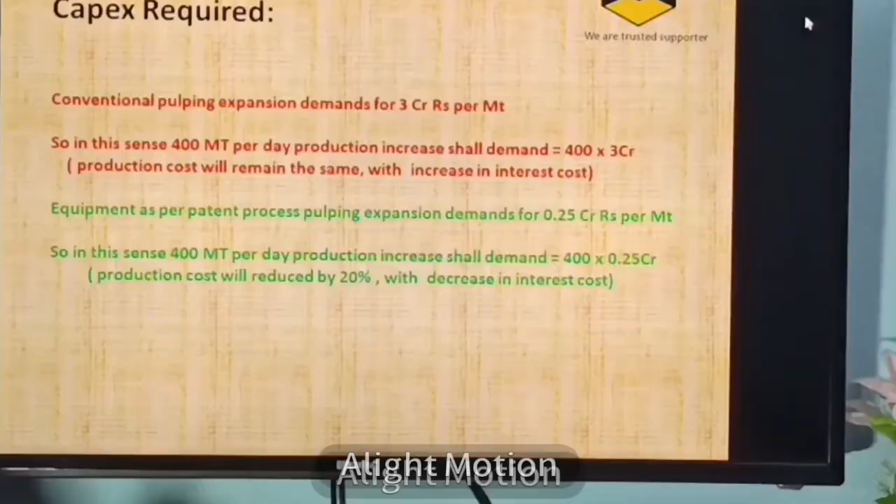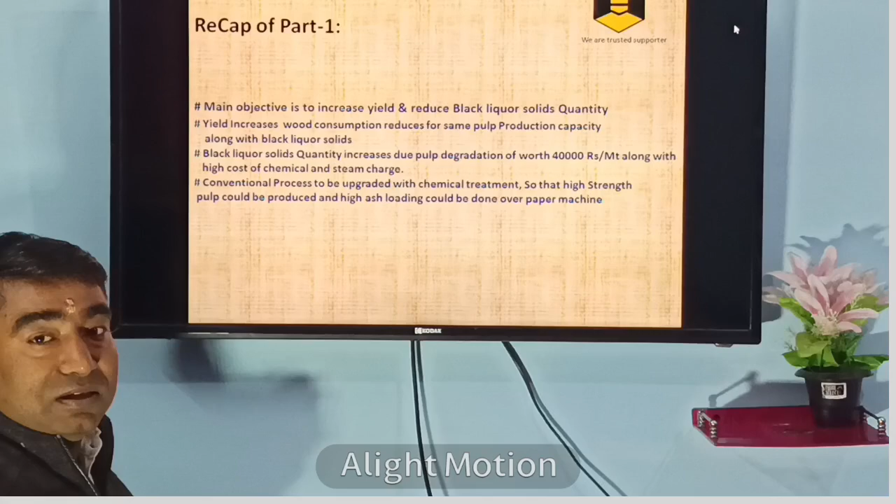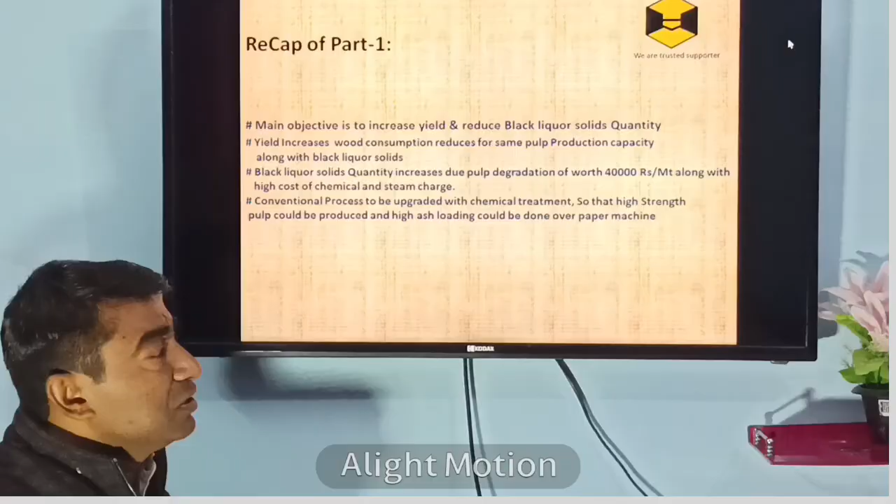In the first part, we have explained so many things. It is basically a chemical treatment of the raw material utilizing the patented process. So, recap of part 1: the main objective is to increase the yield of the pulp and reduce the black liquor solids quantity. As the yield increases, wood consumption reduces for the same pulp production capacity, along with reduction of black liquor solid quantity. Black liquor solid quantity increases due to pulp degradation, worth rupees 40,000 per metric ton, along with the high cost of chemical consumption and steam consumption.

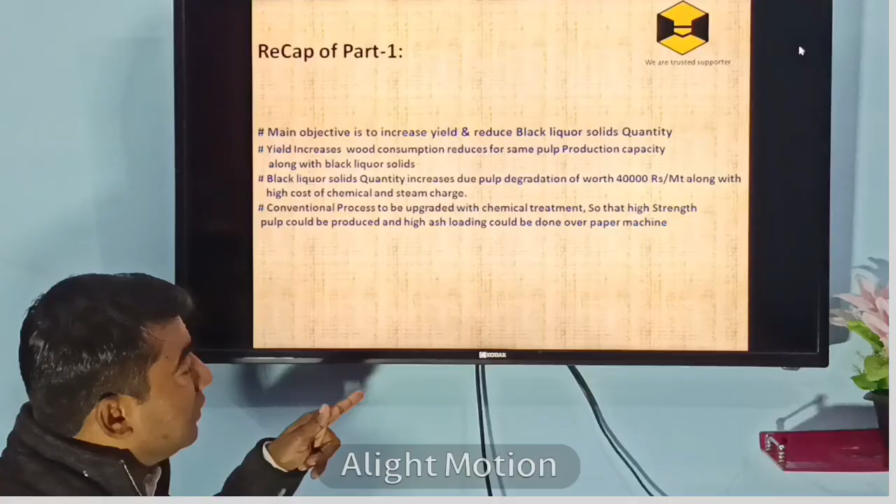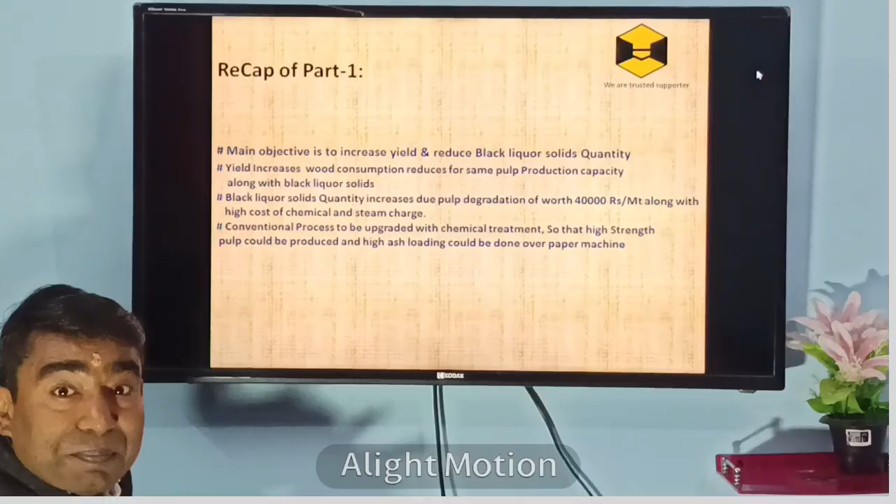The conventional process needs to be upgraded with this chemical treatment so that high strength pulp can be produced, which in turn will help to load more ash over the paper machine so that the overall cost of production is reduced.

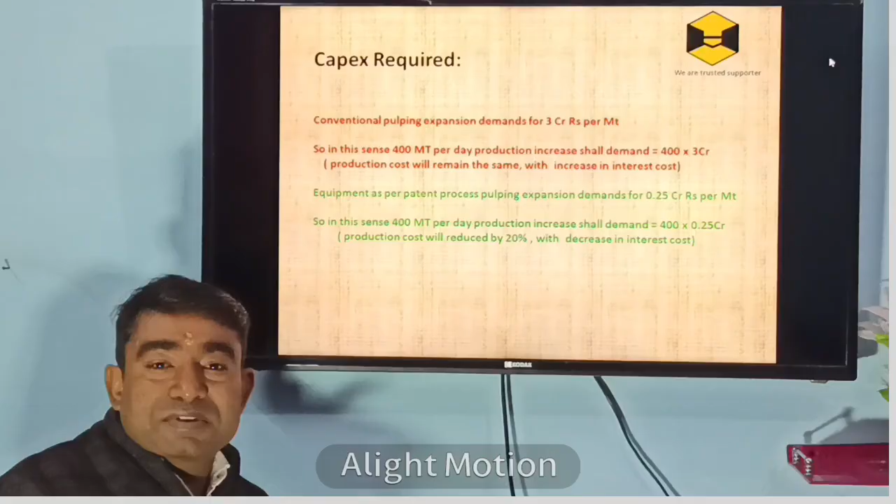So now, as I told in the previous version, how much it will cost to invest, how much it will cost to install this plant, and how we calculate the economics related to it.

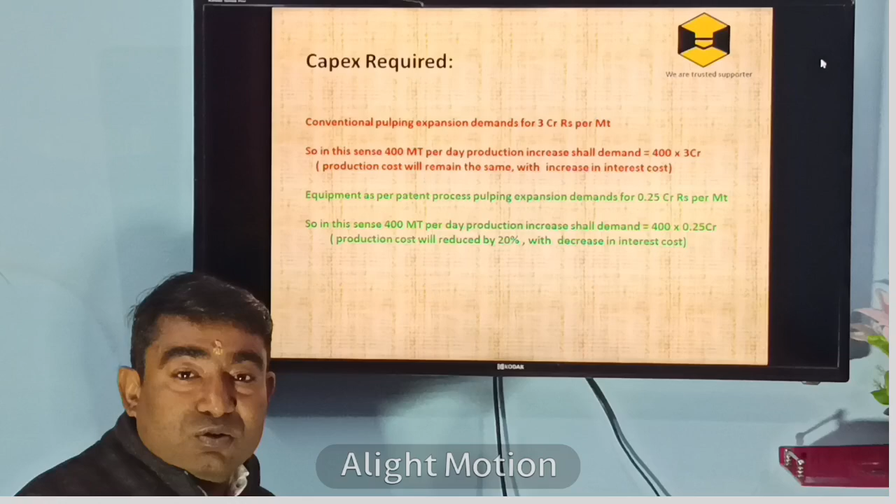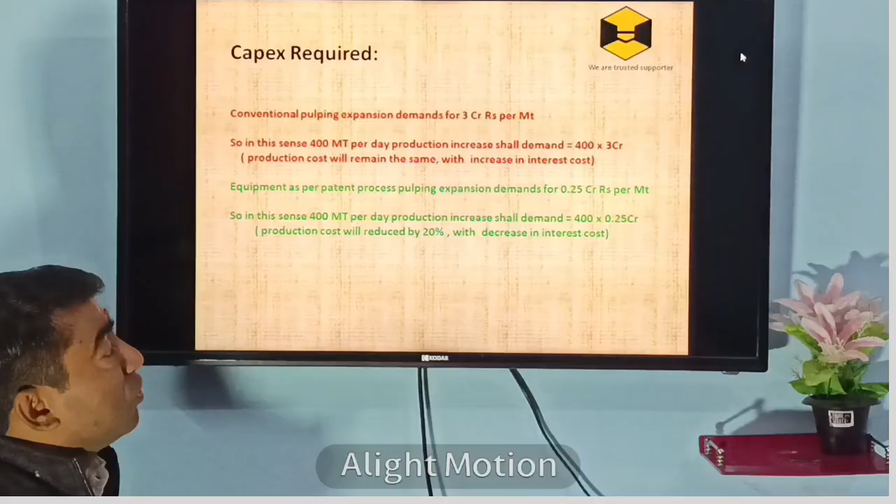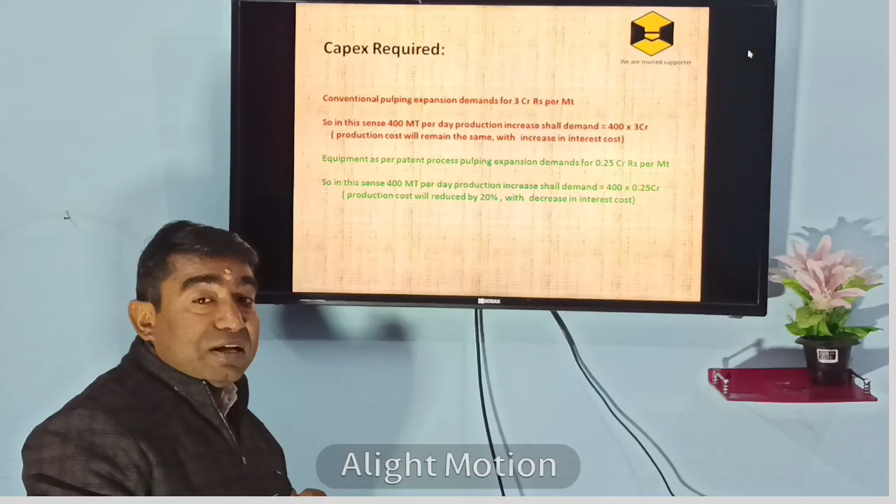In the conventional system, if you go for expansion, you will find it requires almost 3 crore rupees per metric ton capacity augmentation. So, suppose you have 400 metric ton capacity production per day and you are thinking to increase by another 400 metric ton production. The requirement of the capex will be 400 into 3 crore rupees. Another thing to note is that though you have invested this much, the cost of production will remain the same. At the same time, the interest cost will increase in the conventional way.

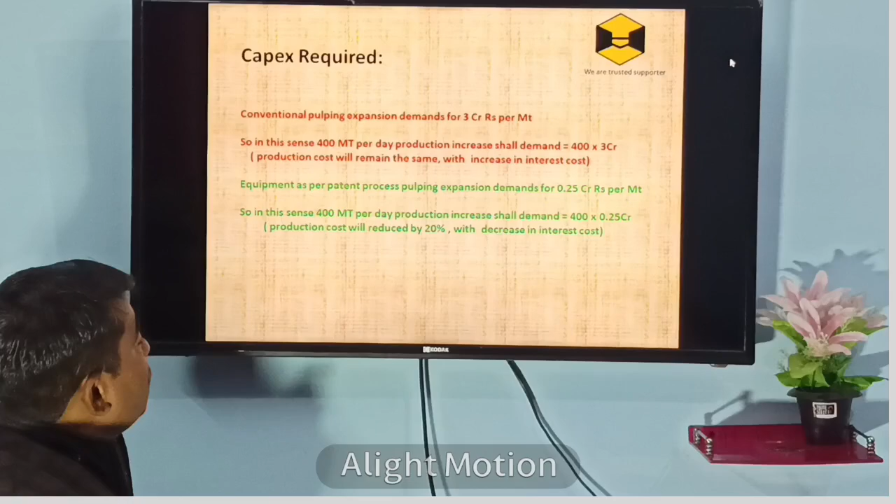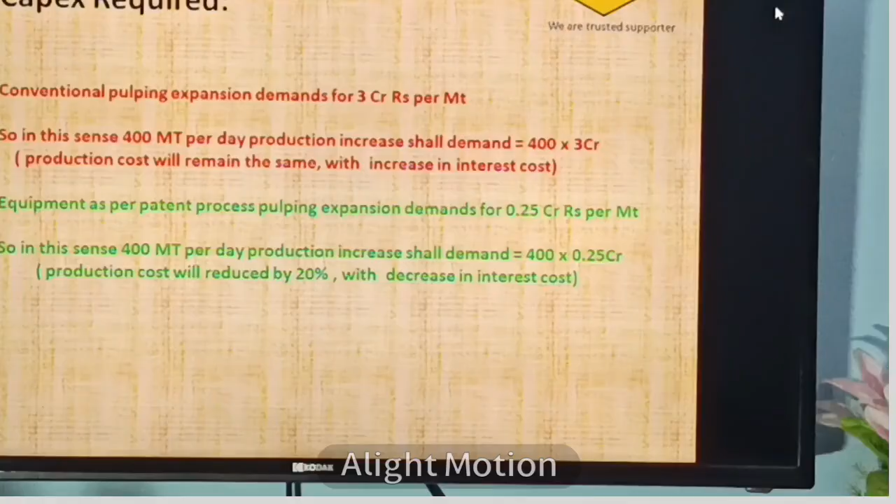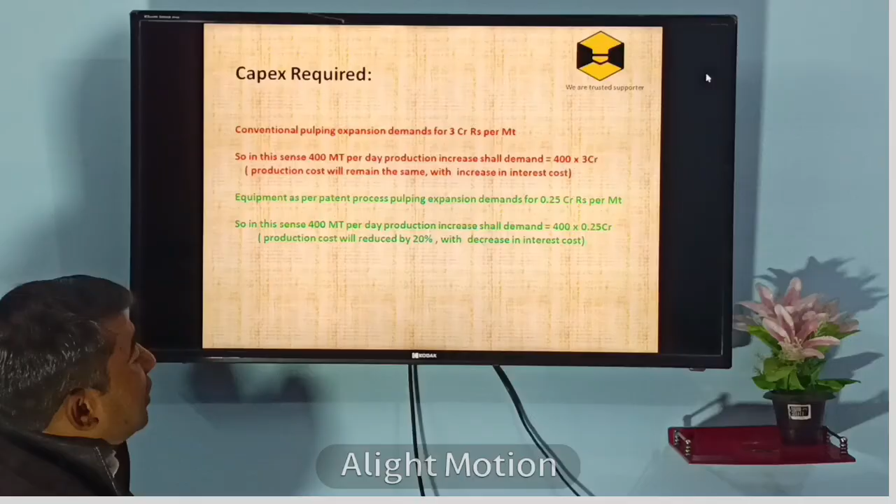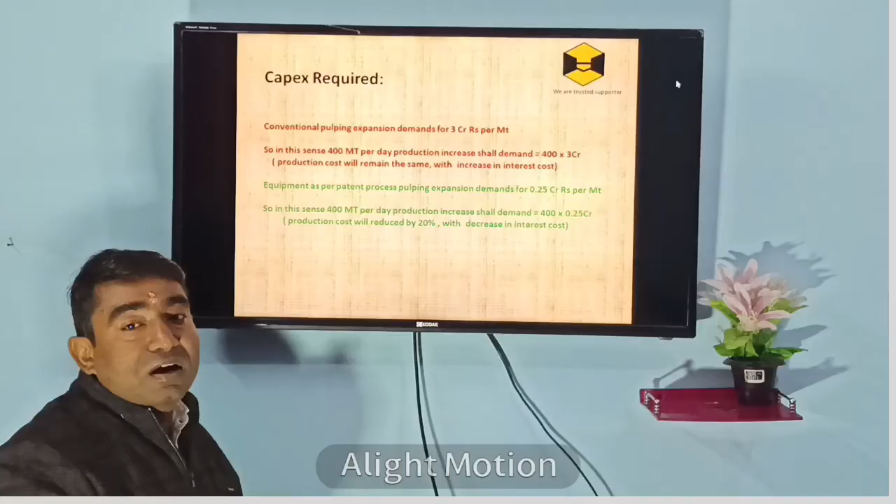Now come to the another patented technology I am talking about. Equipment cost will remain as such, and the new equipment which needs to be procured, fabricated, or installed will cost approximately 0.25 crore rupees per metric ton pulp production augmentation. So, in this sense, if 400 metric ton per day production increases, the capex requirement will be 400 into 0.25 crore rupees. It means 100 crore rupees will be required for the 400 metric ton production augmentation.

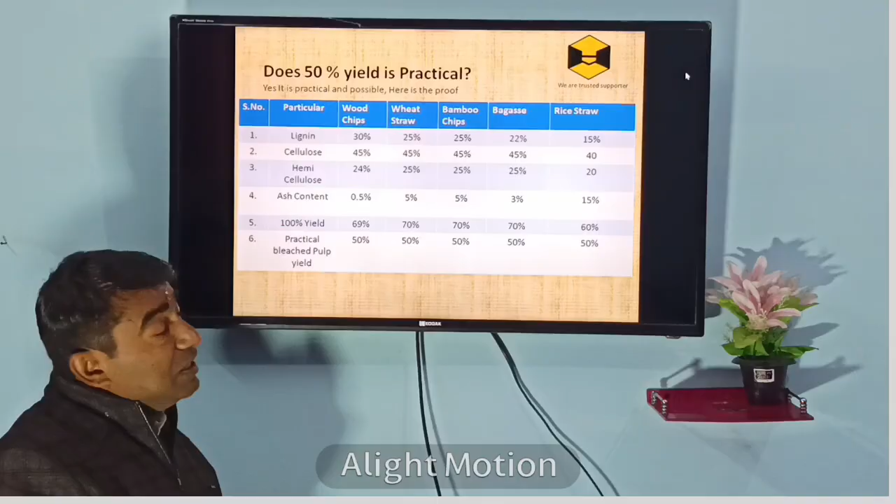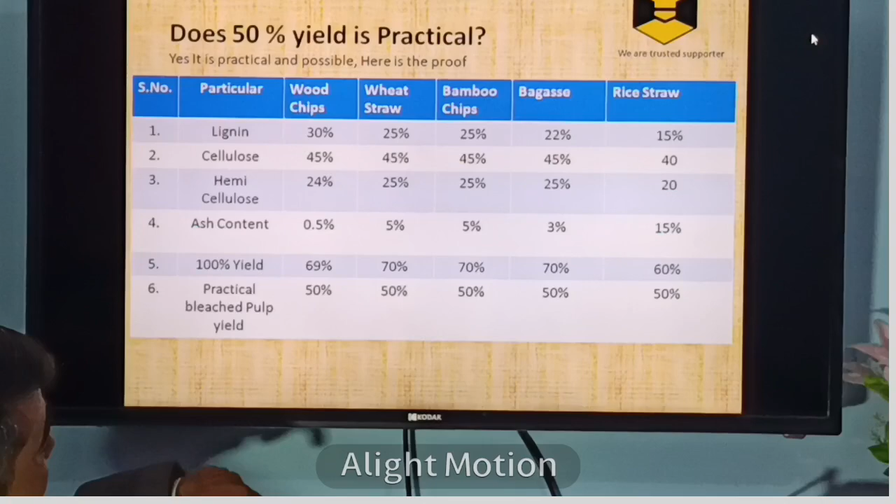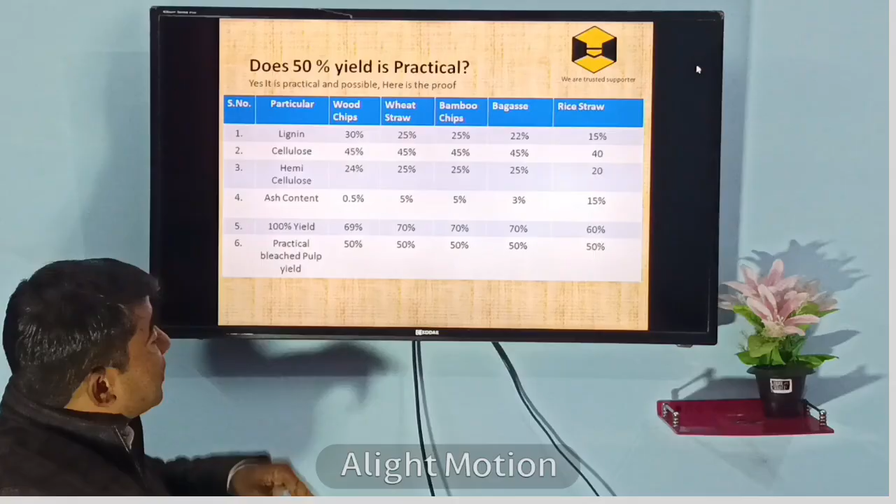So now come to another point: does 50% yield being practical? Yes, it is practical. Look, these are some of the compositions of the various raw materials. Suppose we have wood chips - you will find ash content is 0.5% and cellulose and hemicellulose is approximately 69 to 70%. It means that at 100% efficiency, 69 to 70% yield is possible on average. But practical yield of 50% must be targeted.

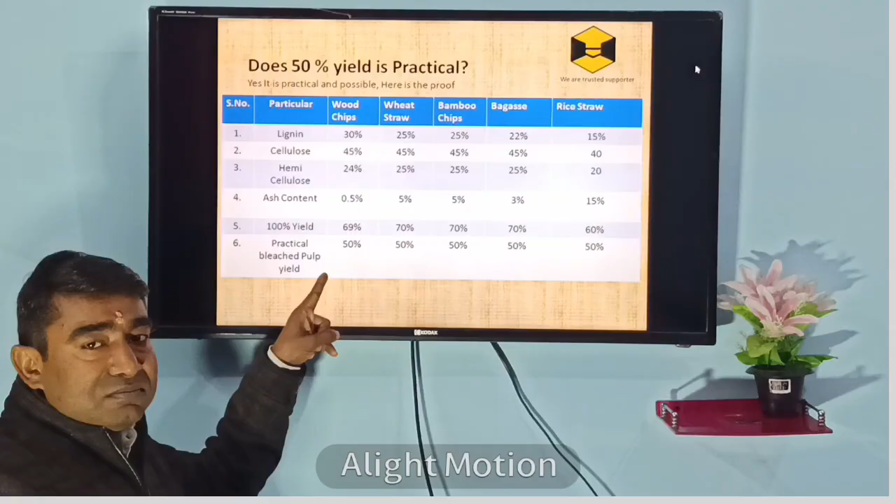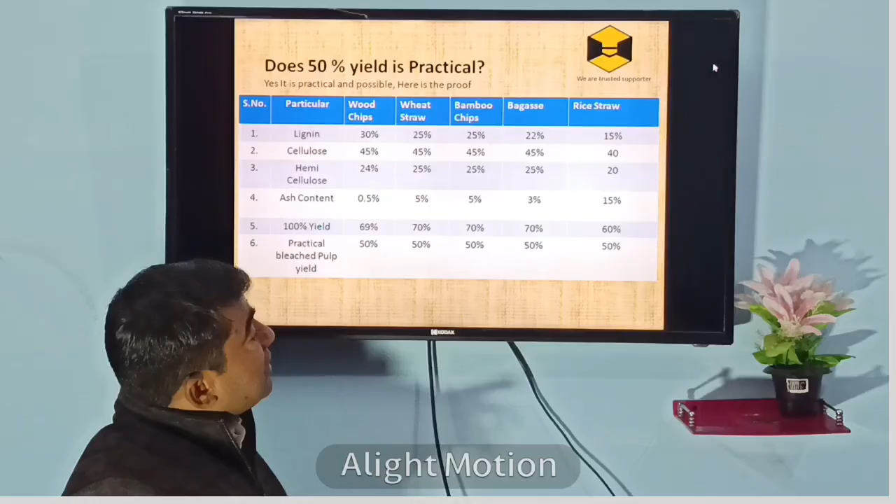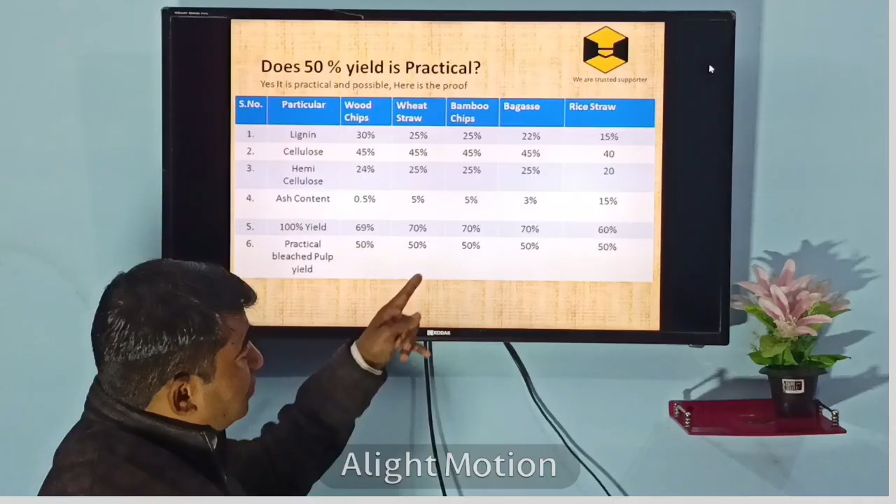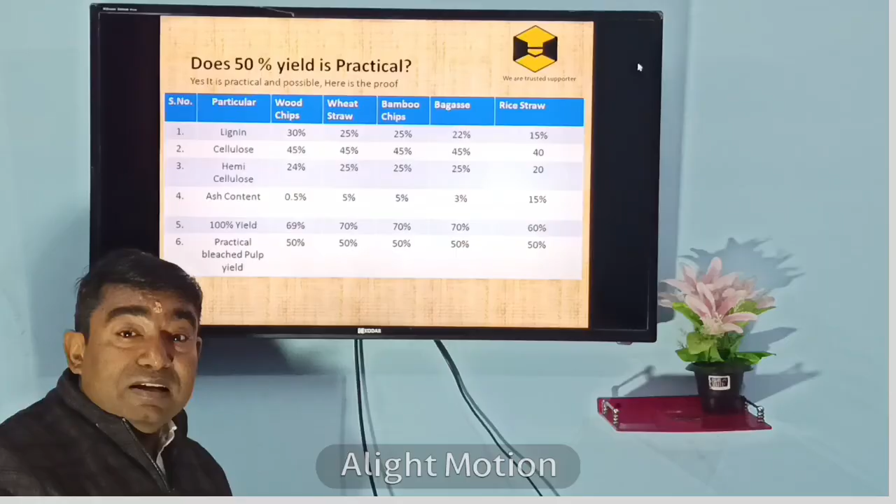Similarly, wheat straw contains 25% lignin and 70% maximum yield is possible, with a practical yield of 50% for bleached pulp. Similarly, in case of bamboo chips, 70% yield at 100%, and practical yield of 50% should be there. Similarly, in bagasse, 50% yield is possible. In case of rice straw, this technology itself is sufficient to remove the silica - up to 95% silica can be removed - and rice straw is abundantly available in our country at the lowest possible cost. I will come to, in a further slide, how to remove the silica from rice straw.

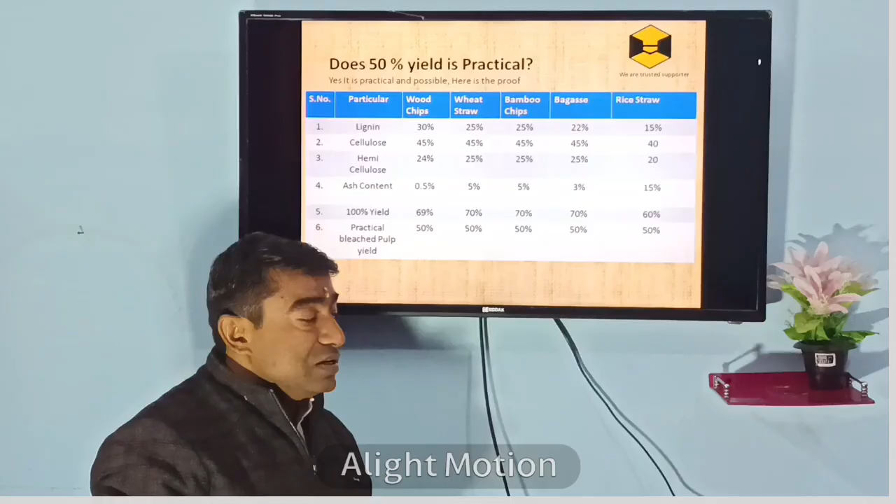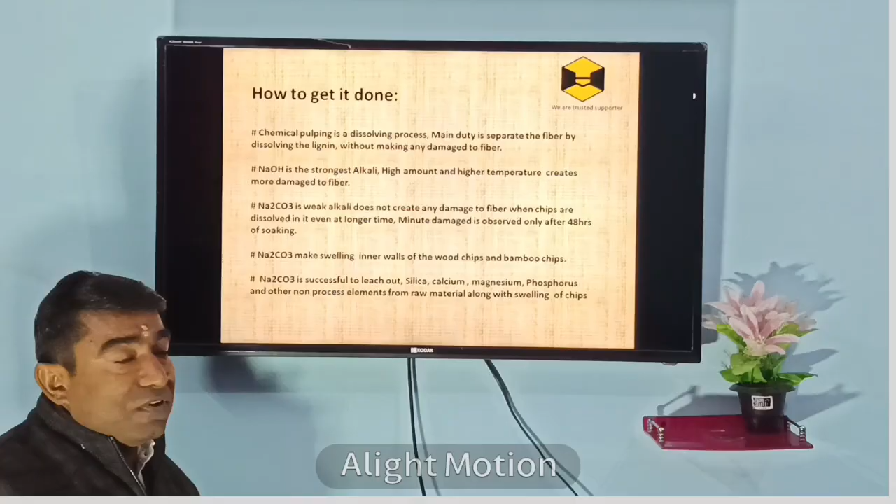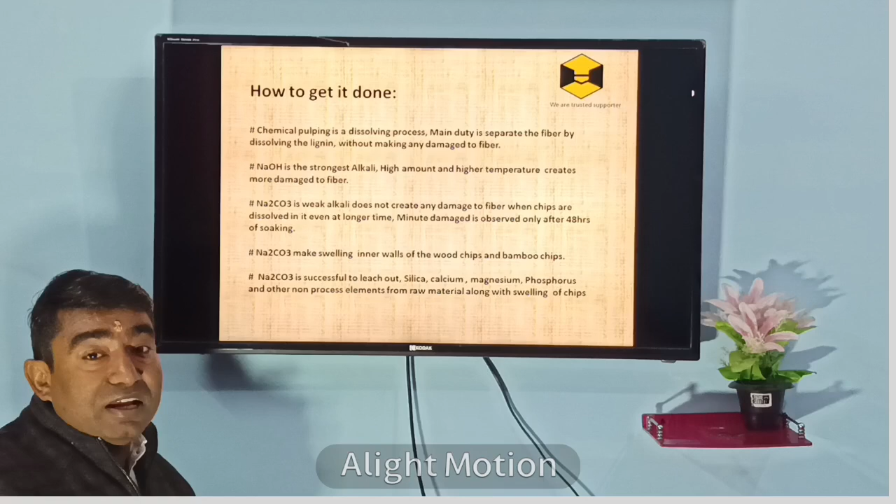Let us move to the next part. So how does it get done? Chemical pulping is basically a dissolving process. The main duty is to separate the fiber from the lignin selectively. So our process must be such that it should not impact the fibers - it must not damage the fiber. Second, NaOH is the strongest alkali; a high amount and high temperature create more damage to the fiber.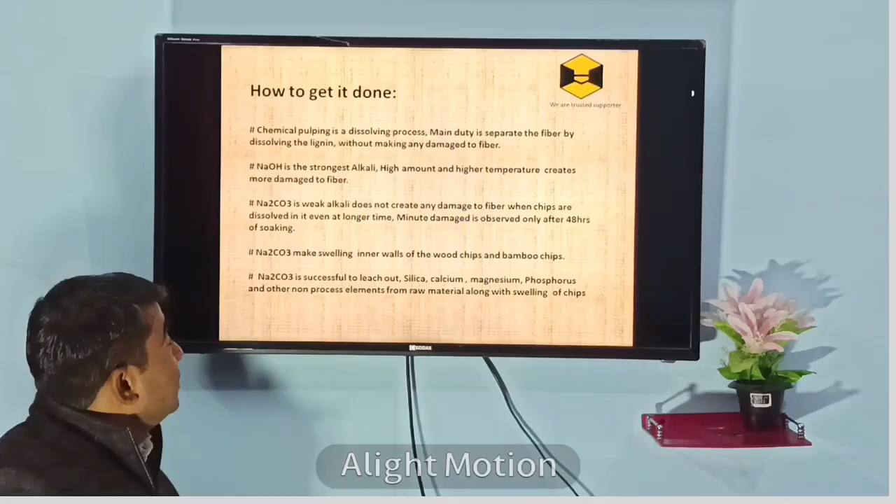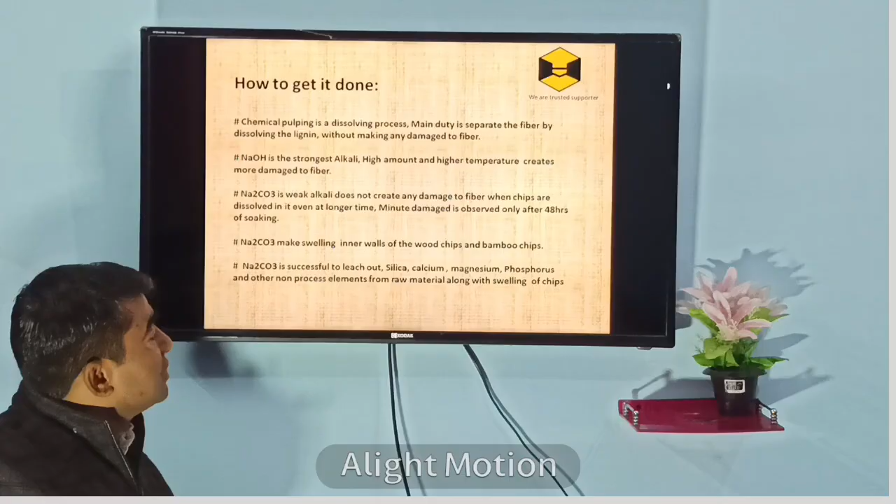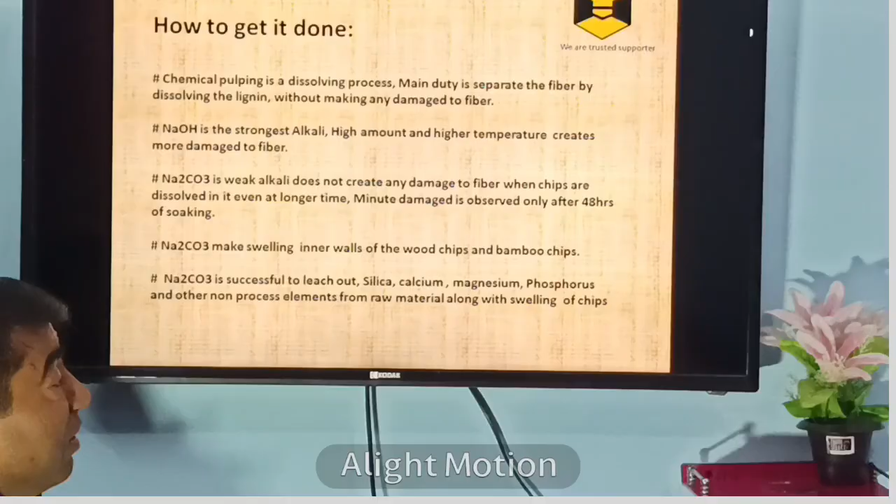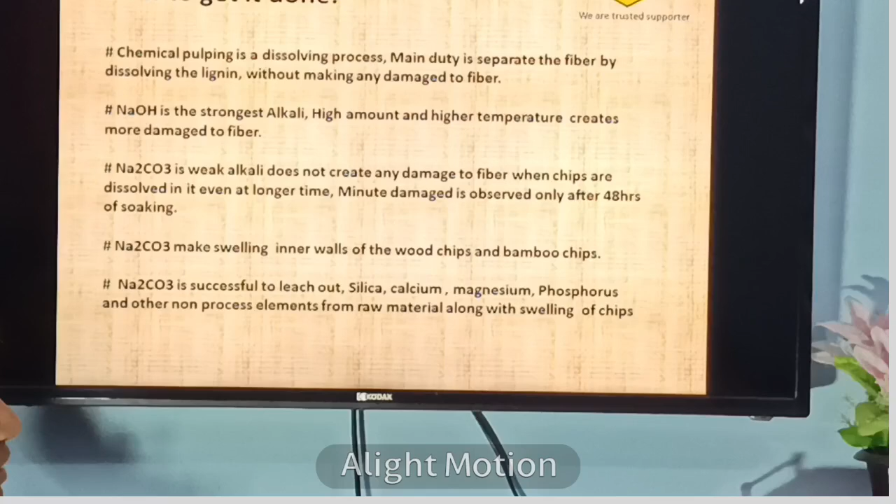Point number three, sodium carbonate is a weak alkali. It does not create any damage to the fiber when chips of bamboo or hardwood are dissolved in the Na2CO3 solution of concentration 5 to 10%, and even some degradation is seen, but only after 48 hours - otherwise no further degradation is usually observed. So Na2CO3 causes swelling of inner walls and lamella of the wood chips and bamboo chips, making fiber segregation easy. Na2CO3 is an excellent chemical to leach out silica, calcium, magnesium, phosphorus, and other non-process elements, along with swelling of the chips and raw materials.

Now, methodology and assumption. First case is the hardwood.

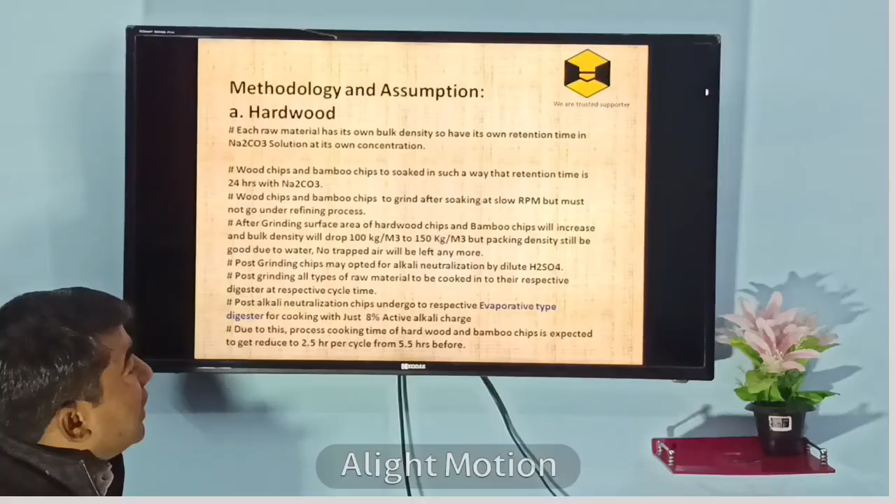Each raw material has its own bulk density and its own retention time in Na2CO3 solution at its own concentration.

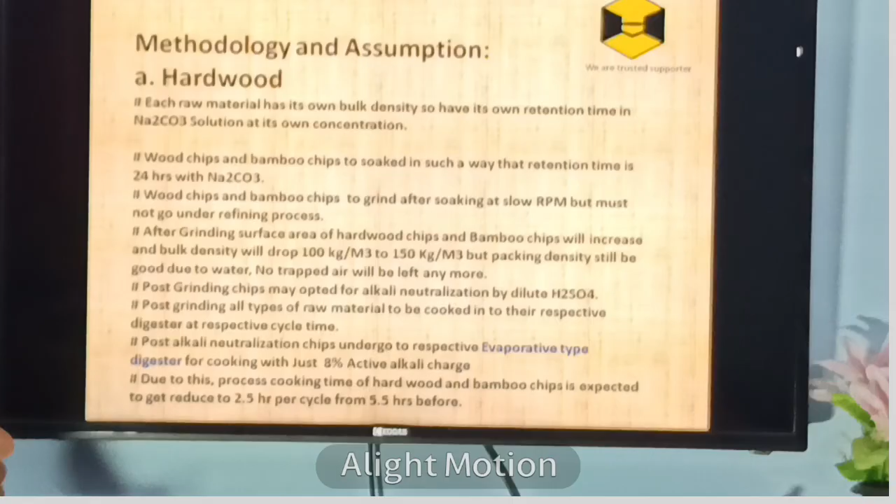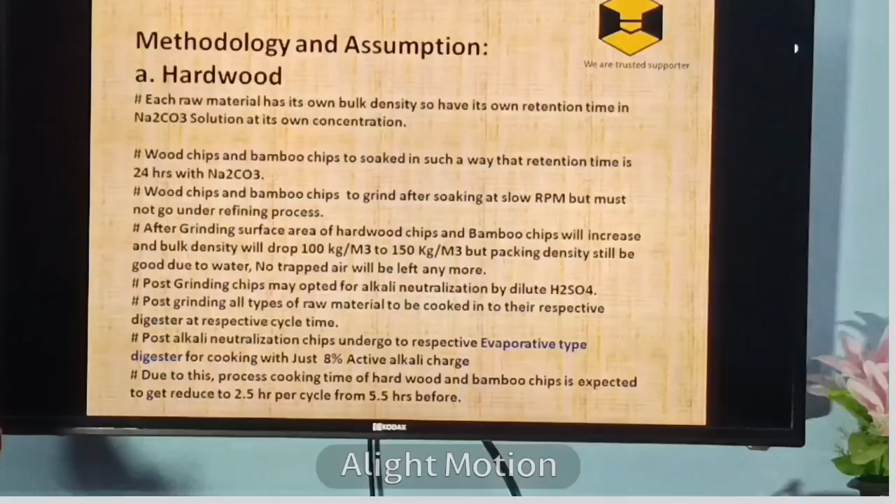Wood chips and bamboo chips need to be soaked such that retention time is at least 20 to 24 hours. After soaking, wood chips and bamboo chips are grind at slow RPM so that there is no damage to the fiber.

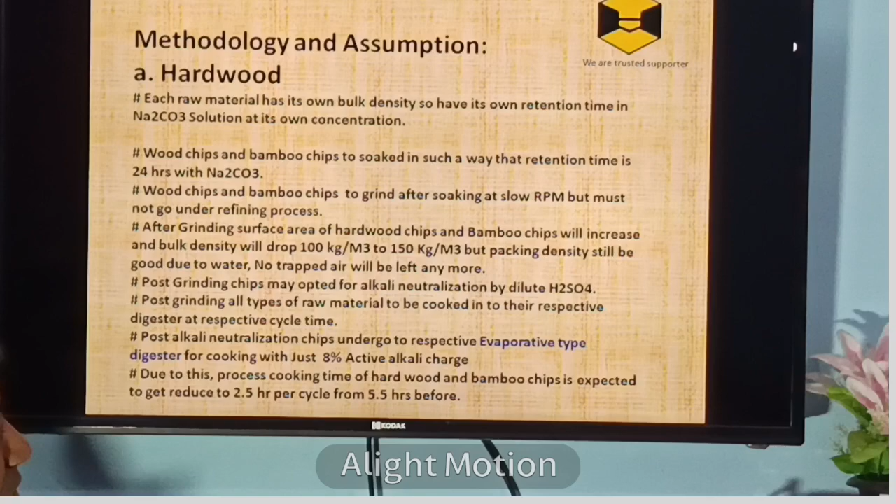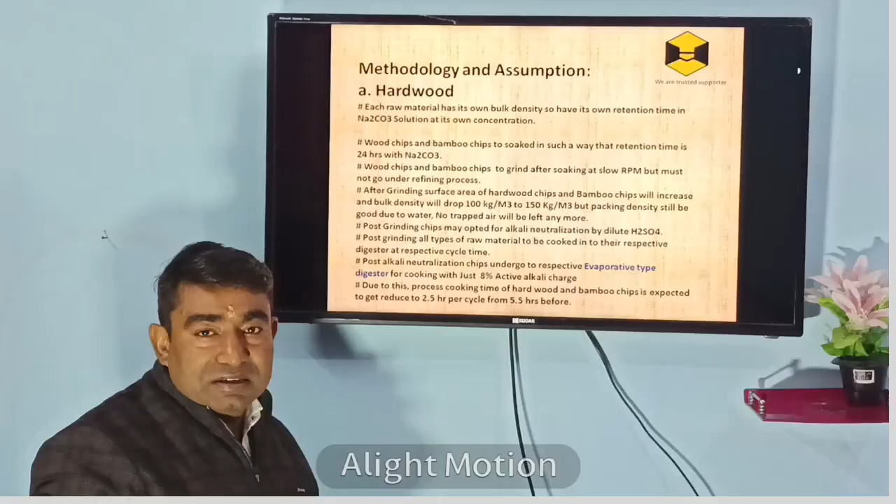After grinding the raw material, the surface area of wood chips and bamboo chips increases and the bulk density decreases. But packing density will still remain the same due to availability and the moisture content within it, as it is drenched properly in the solution, so no trapped air is left anymore.

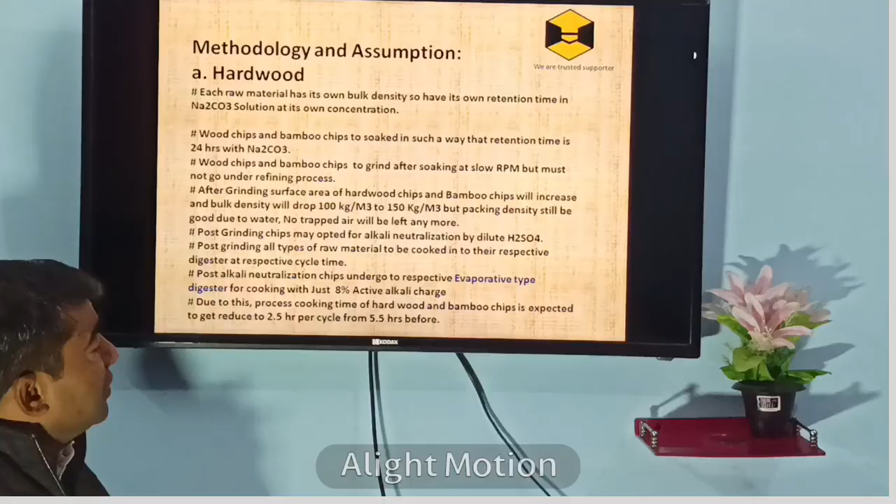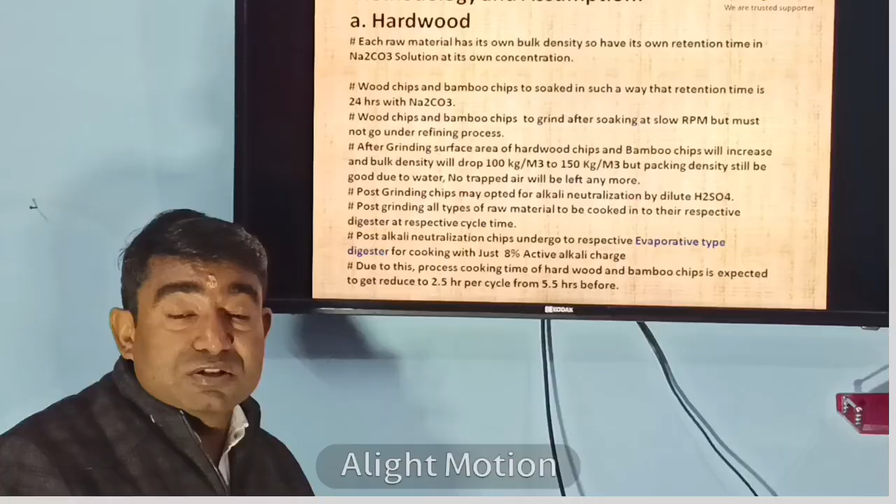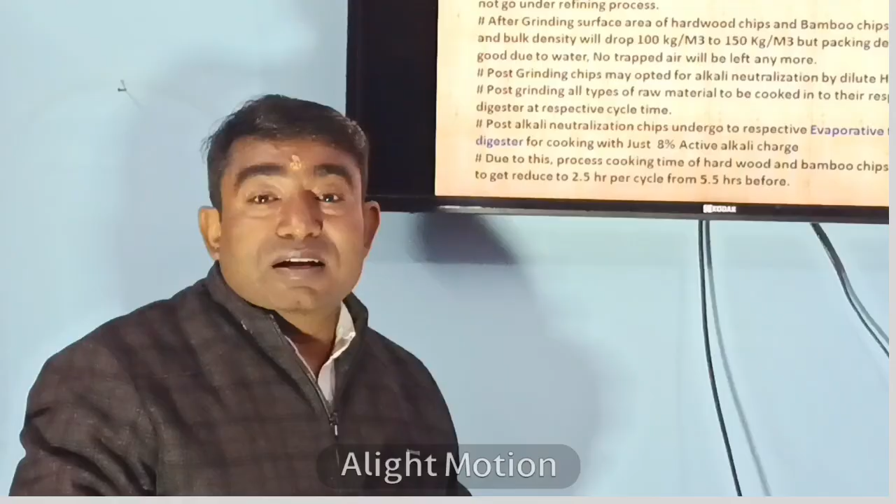Post grinding, material may be opted for alkali neutralization by dilute H2SO4. This H2SO4 neutralization is important from a rayon grade type of pulping, which removes metal ions, acid insoluble, and other non-process elements which is necessary. When acid neutralization is performed, this pulp becomes excellent. Brightness improves and specks, dark spots, all get removed from the raw material itself.

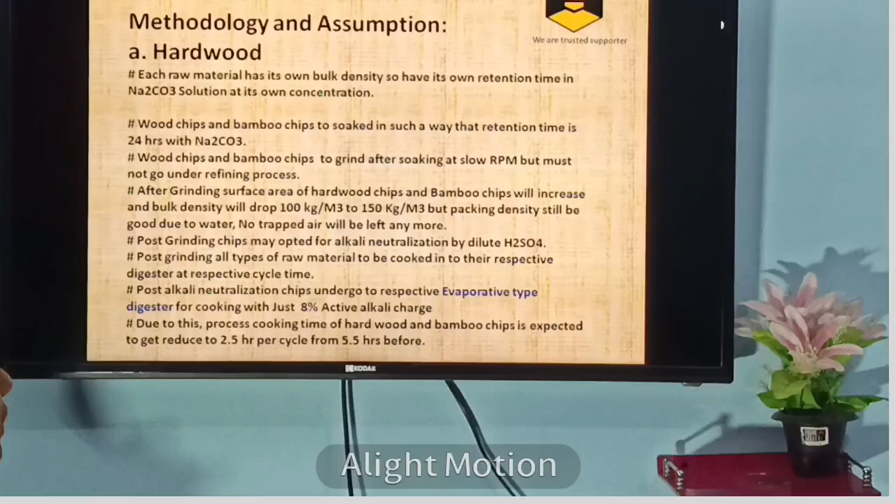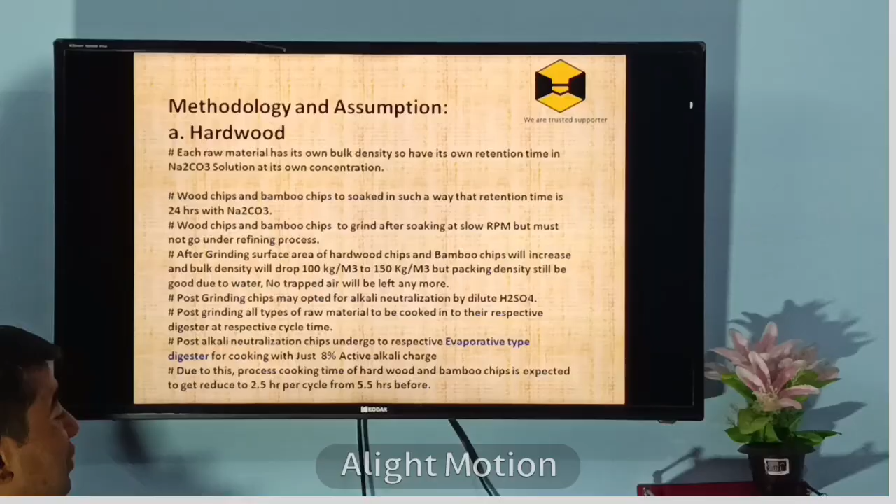So post grinding, all types of raw material are cooked in the respective digester at respective cycle time. Post alkali neutralization, this may go into an evaporative type of digester with cooking chemical at just 8% in case of wood chips and bamboo chips in the first stage.

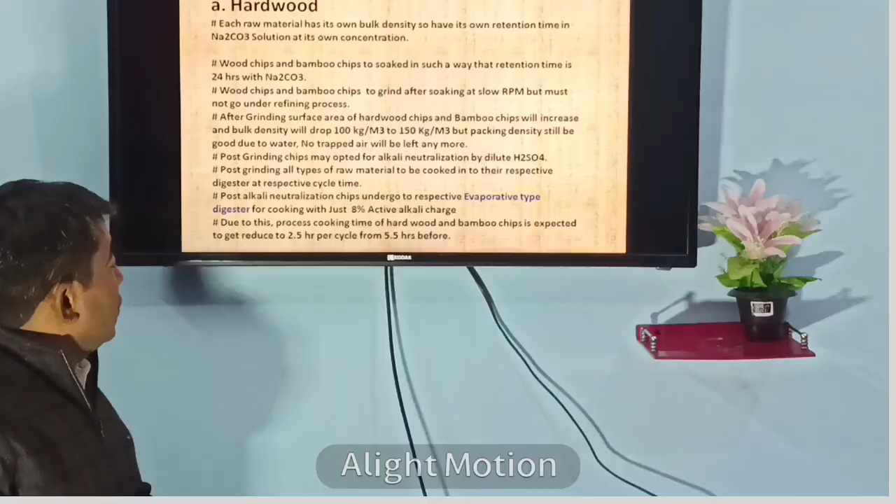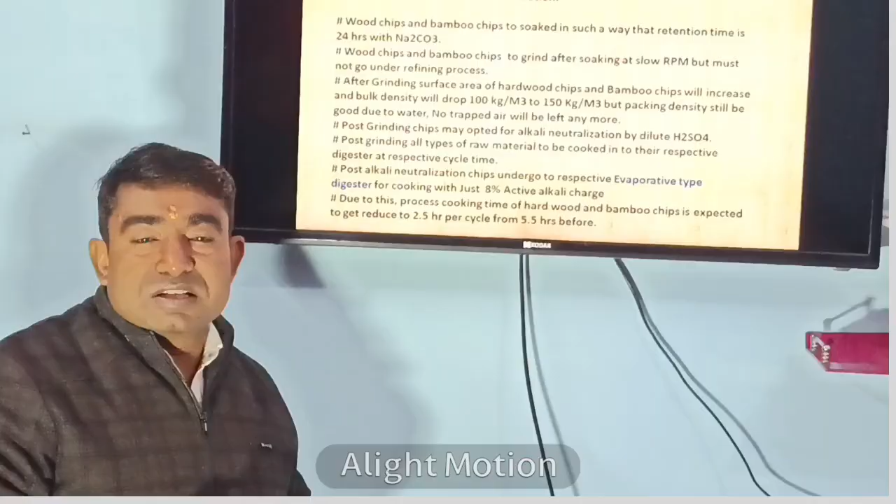Due to this process, cooking time of hardwood and bamboo chips is expected to be reduced by 50%. Means if our cycle time is 5.5 to 6 hours, now it will be maximum 2.5 to 3 hours.

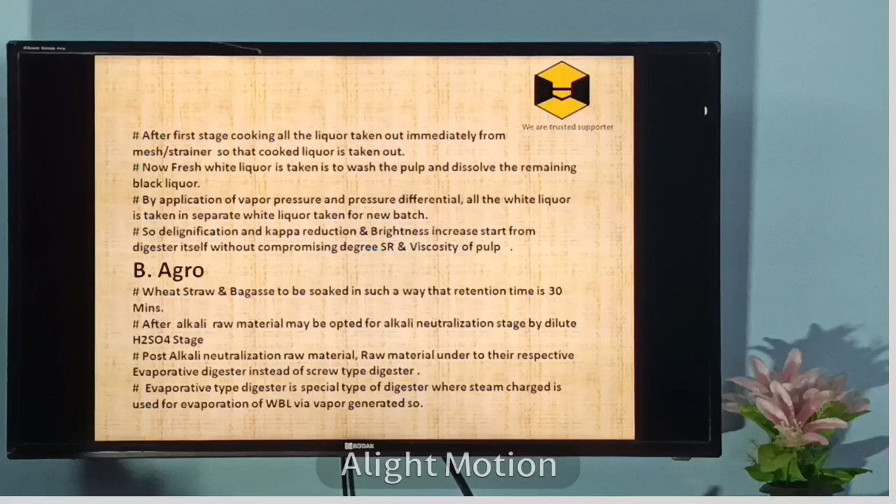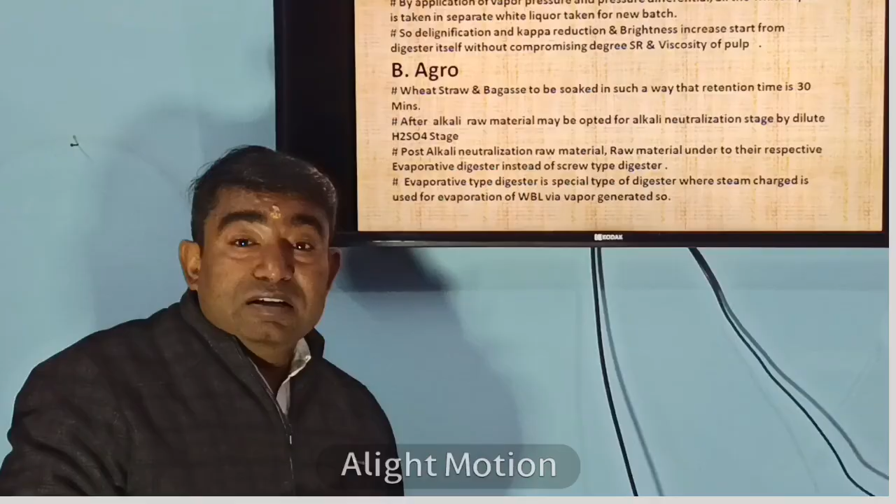After first stage cooking, all the liquor from the digester is taken out from the mesh built into the evaporative type digester, so that viscosity and other parameters remain intact.

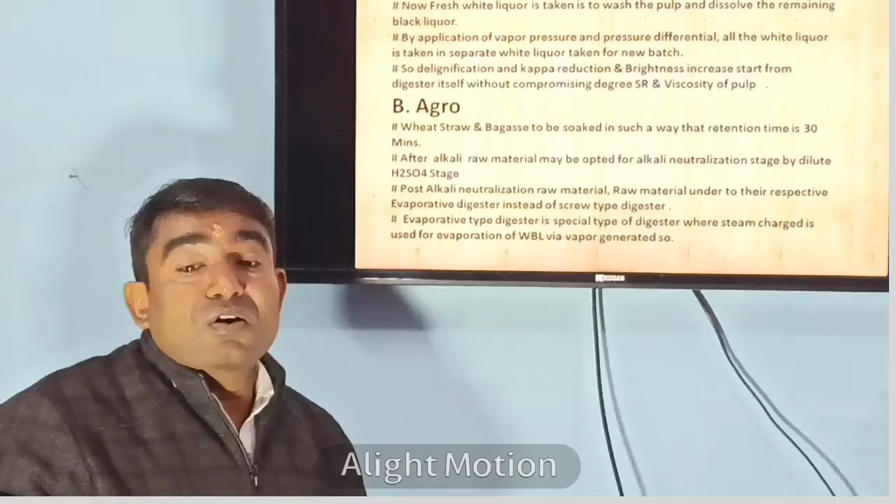Now, because most of the black liquor is taken out, a fresh dose of white liquor or cooking chemical is sent into the digester, because lignin is more dissolvable in white liquor and NaOH. So it removes the remaining lignin from the digester itself.

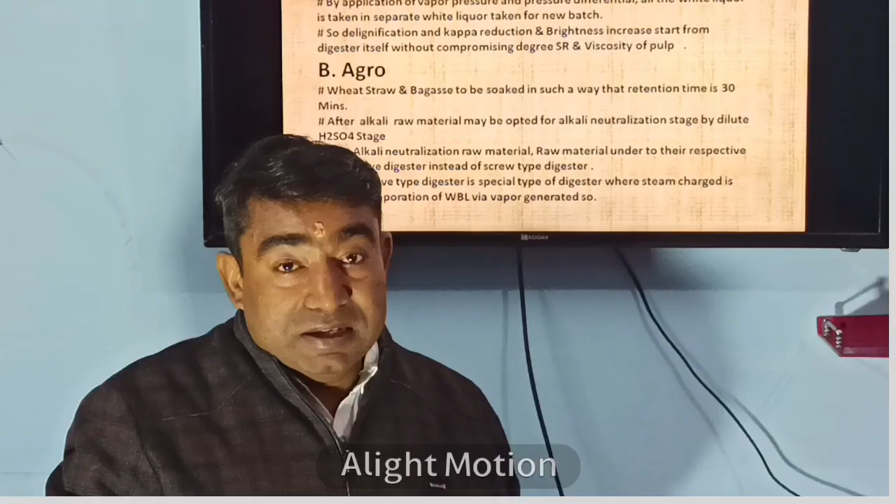Due to removal of the lignin, the kappa number of the material reduces and brightness increases, which is the prime objective. So the system is designed such that brightness starts to increase from the digester itself.

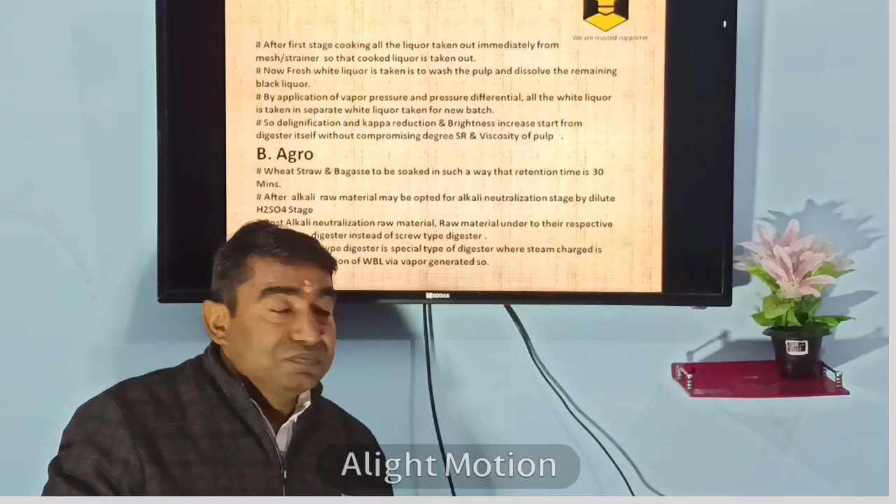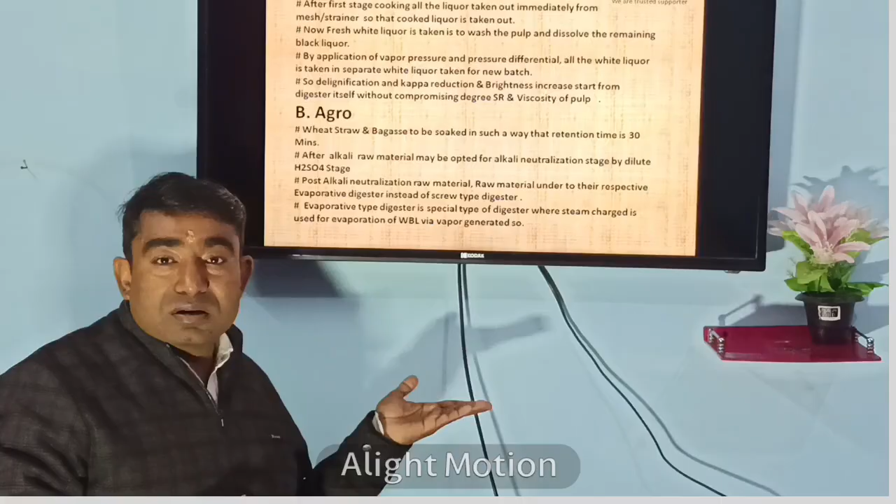Now come to point number B. Wheat straw and bagasse are to be soaked such that the maximum retention time is 30 minutes. Note that hardwood requires more soaking time as compared to this agro-based raw material, because its bulk density is low and its surface area is more. So more surface area of the material is required to have a faster cooking.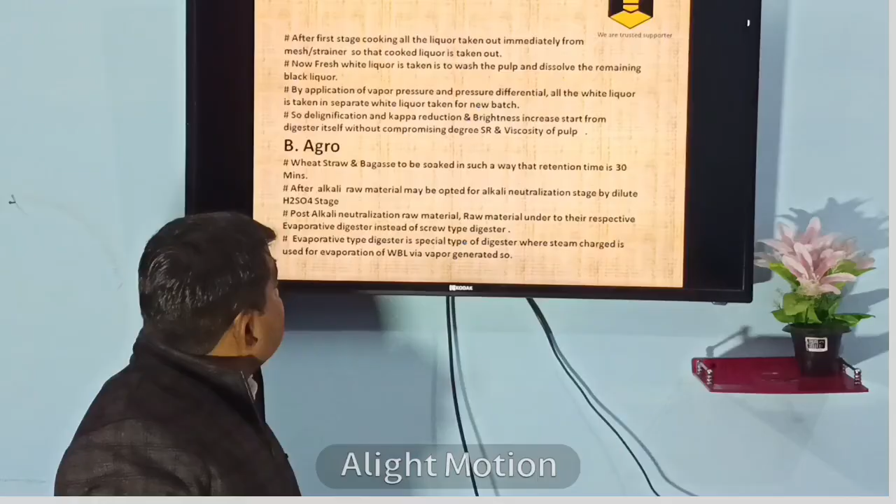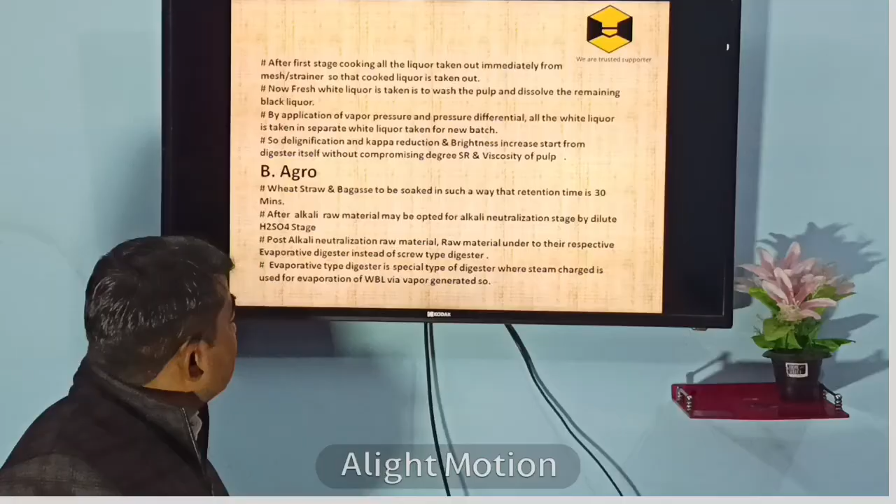After alkali soaking, raw material may be opted for acid neutralization or alkali neutralization by the dilute H2SO4 stage. Post alkali neutralization, raw material may undergo the evaporative digester instead of a screw type digester.

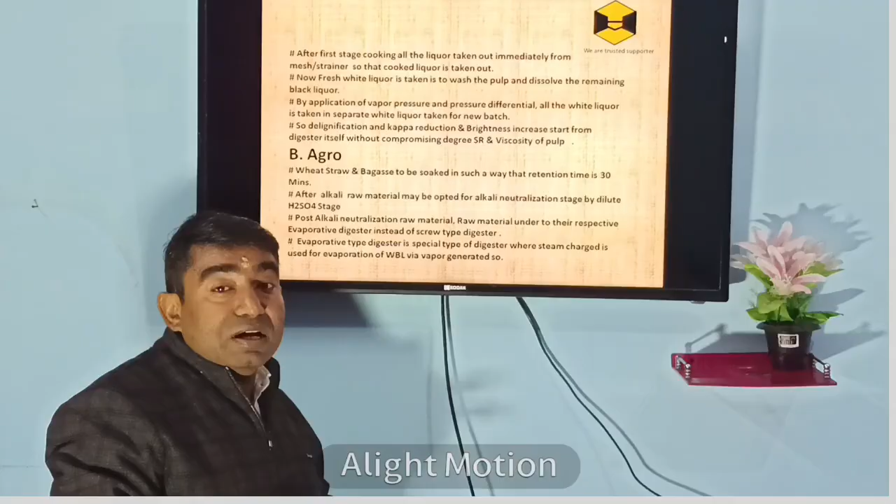Why is an evaporative digester required? I will explain in the coming part. This evaporative type digester utilizes vapors of the digester to evaporate the black liquor into strong black liquor, so you need not utilize live steam in the evaporators.

So in a nutshell, previously in the conventional system, the pulp mill used to produce black liquor of 15% solids, which was sent to recovery for evaporation, where it asked for live steam, LP as well as MP, to evaporate it up to 65 to 70%. Here, the whole energy given to the digester itself will be sufficient to evaporate. So finally we will just have to fire the SBL in the recovery boiler. Further, no live steam will be required for the recovery part.

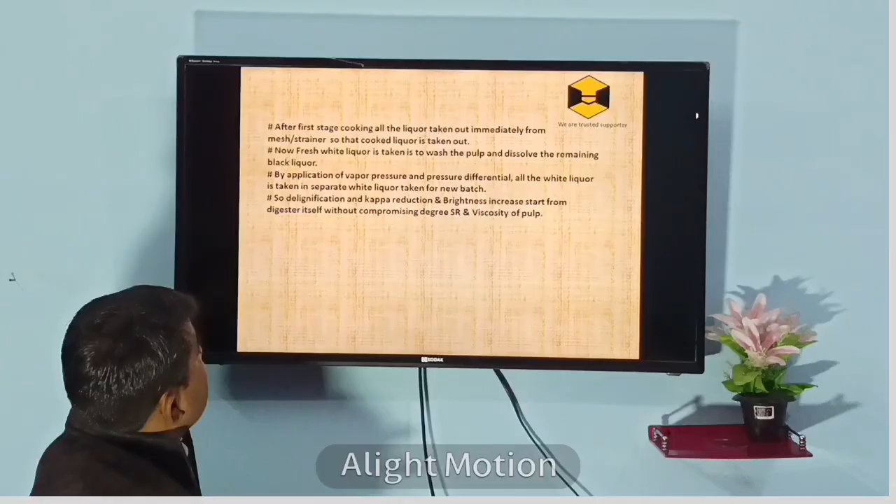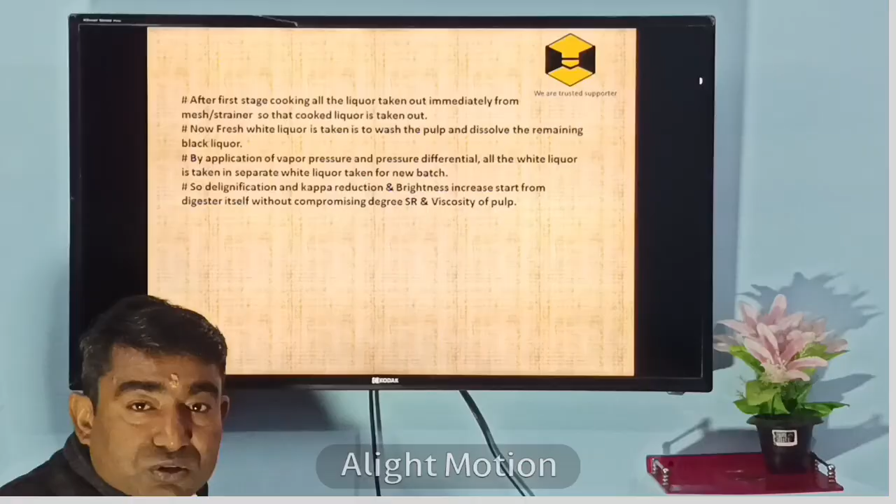So after first stage cooking, all the liquor will be taken out similarly as done in the hardwood case, from the strainer, and a fresh dose of white liquor will be dosed to remove the residual lignin from the digester itself, due to pressure difference, because all the lines are connected such that all the liquor will be taken out from the strainer itself.

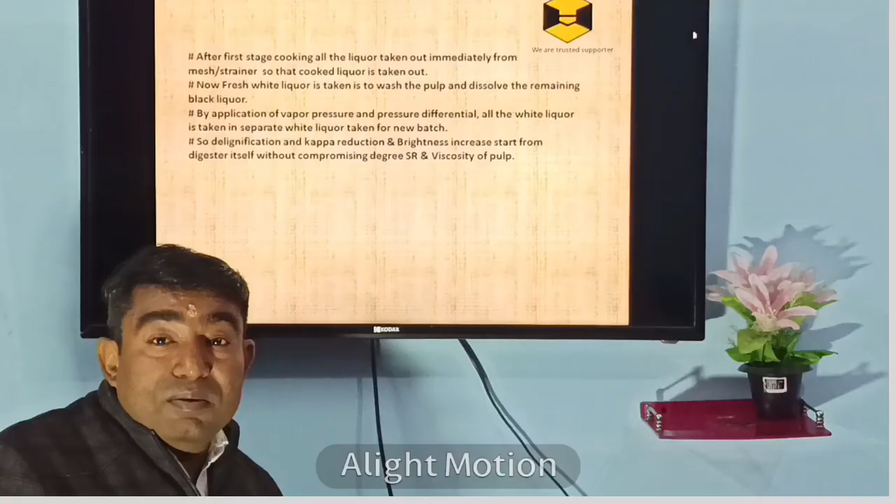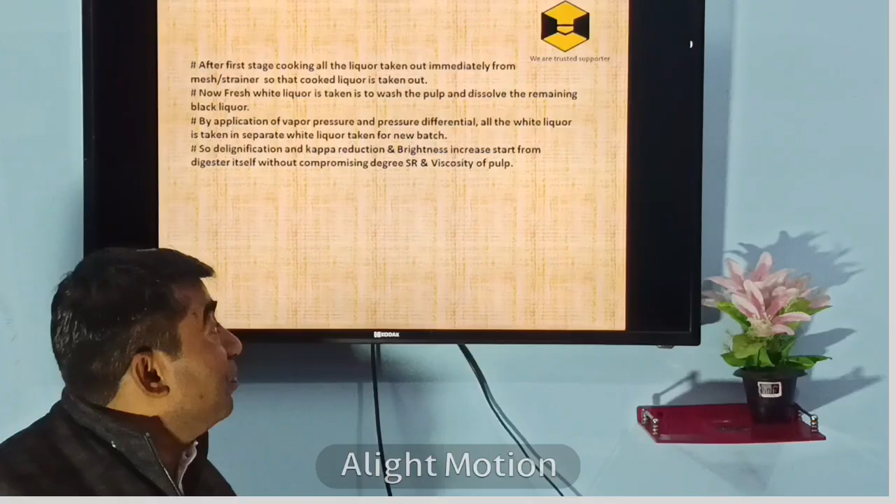So lignin will reduce from the pulp, and delignification starts from the digester itself, as well as brightness of the pulp will also increase along with reduction in the kappa number. At the same time, kappa number will reduce, but the strength of the fiber will remain intact.

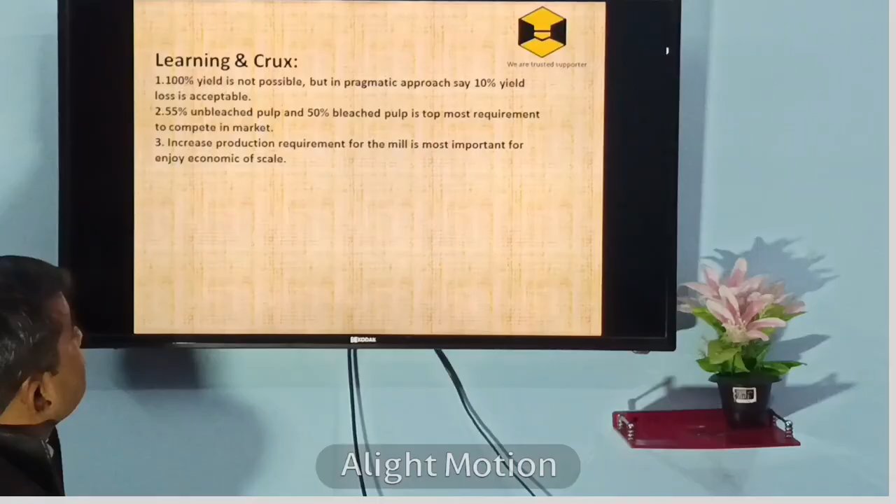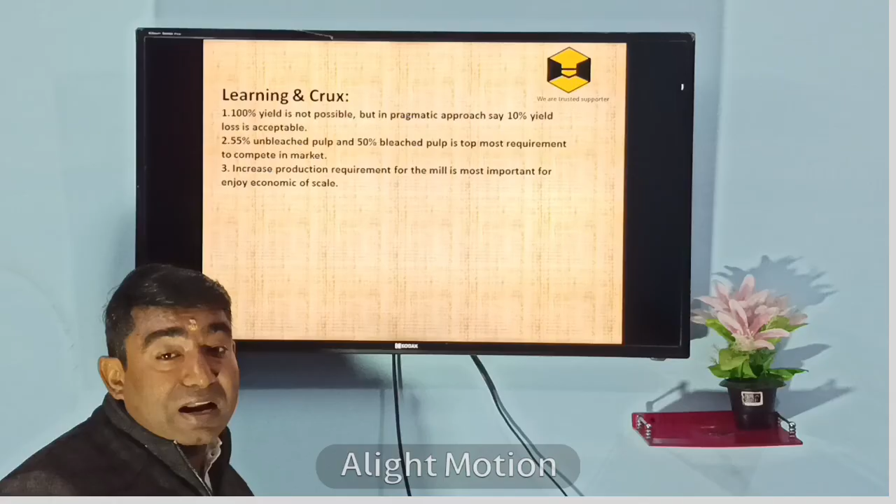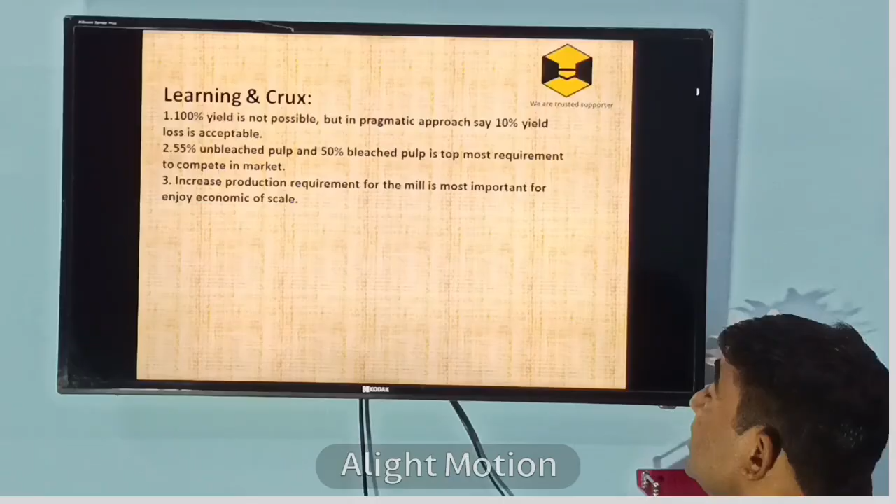Now learning and crux. 100% yield is not possible, it is known to everyone, but in a pragmatic approach, say 10% loss of pulp is acceptable. Means if our pulp is 70% in the raw material, 55 to 60% of unbleached pulp yield is required, and 50% bleached pulp requirement is the topmost requirement to compete in the market. Increased production requirement for the mill is the most important requirement of the mill to enjoy the economy of scale.